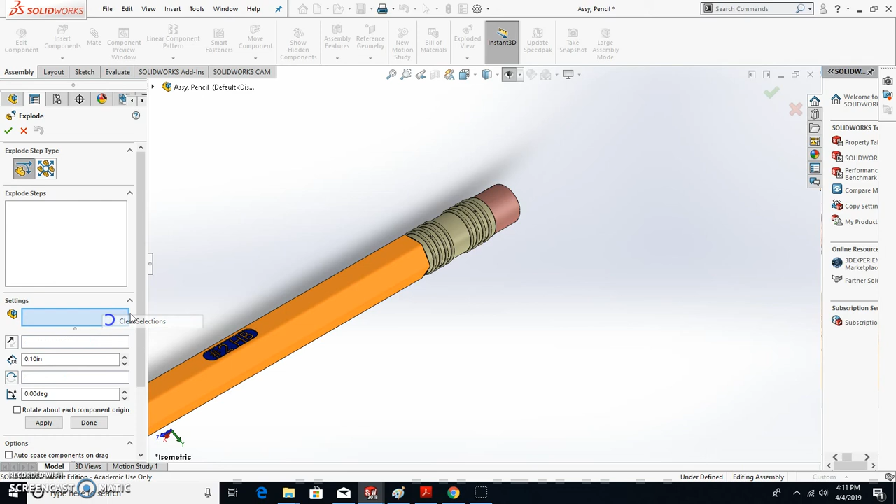The first thing I'm going to do is click on the ferrule and click on the eraser, because I want both of those to come out at the same time. That's one step. Then I'm going to click on the eraser and I want that to come out. That's another step.

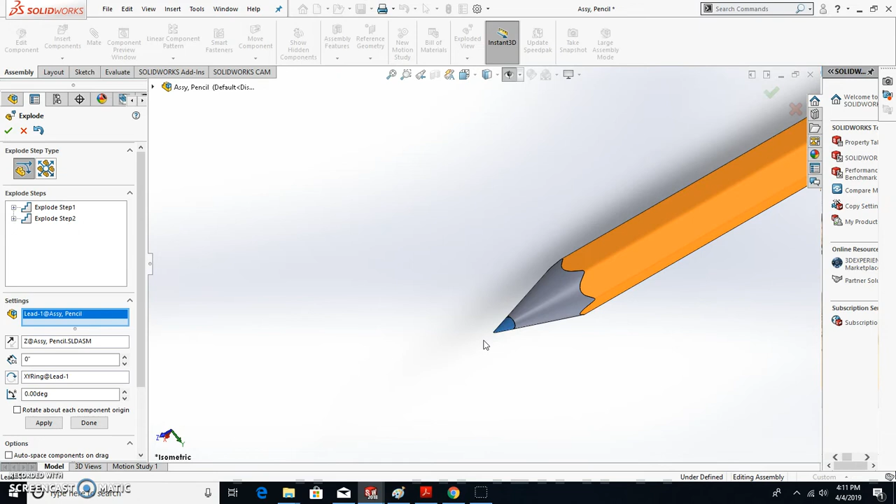Then I'm going to come to the other end and click on the lead, and pull on that same axis. You want all these pulling out along the axial or center line of the part.

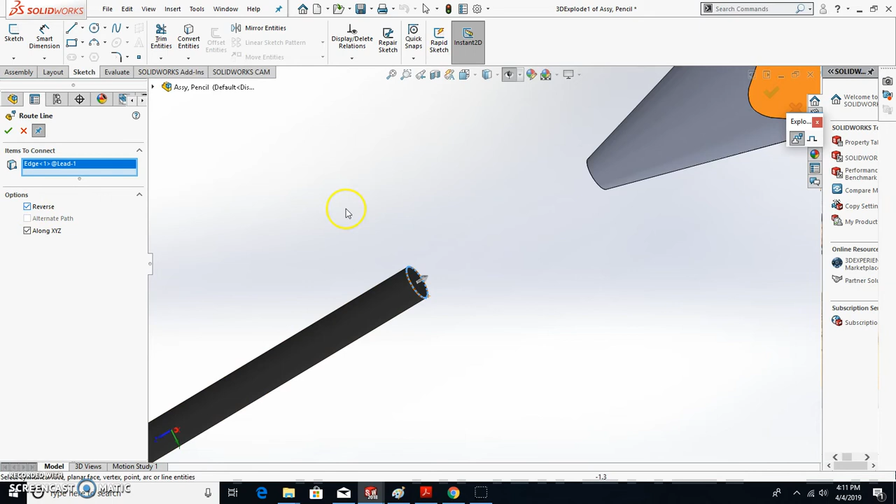Then you accept. And then I want to put in what's called an explode line sketch. I want that sketch to go from here, but the arrow's pointing in the wrong direction, so I'm going to reverse to that edge. Accept.

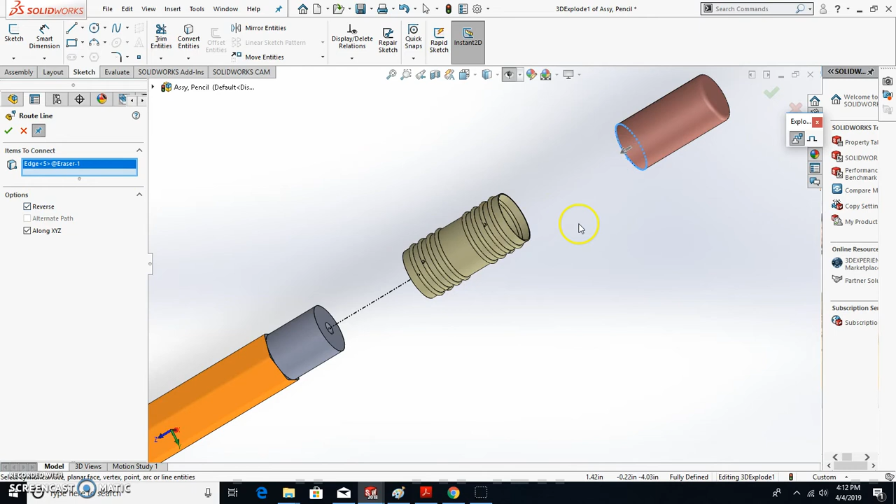And then from this edge, again it's going the wrong direction. Maybe I should pick the other one first. There, accept that. In here, well, of course, it's going the wrong way. And to here. Accept.

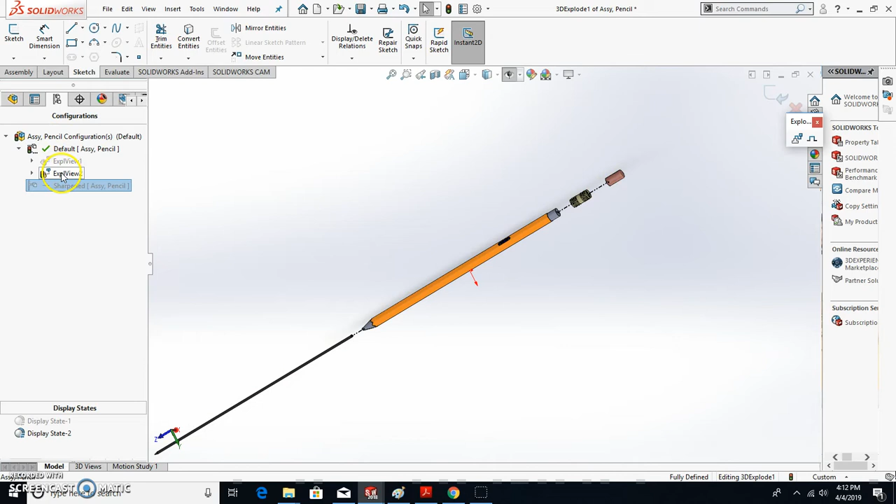Now what that is considered is a configuration, so it's a configuration of your assembly. This icon right here is configurations. So I double click on this—oops, not that—where it says default, click on exploded view, and it'll collapse.

You can also do something fancy by right clicking and animate, so we'll slowly pull those parts off. That's not really needed, so we'll just stop that.

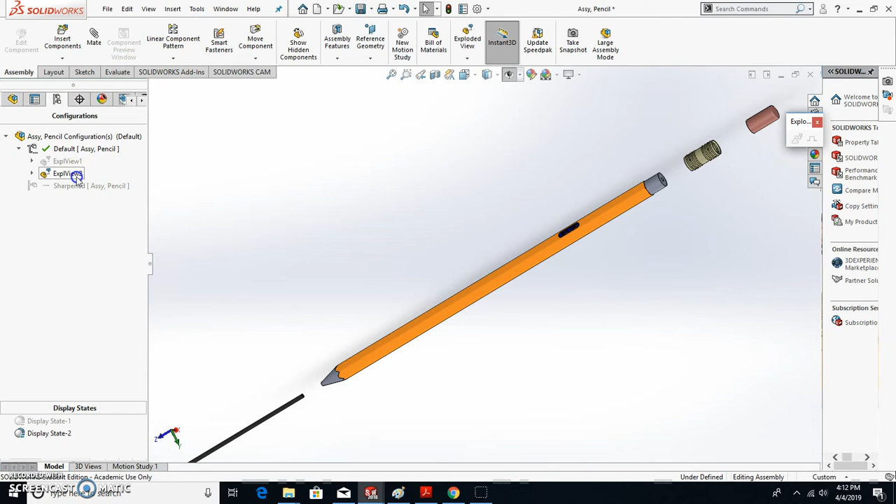So then I double click on the default, and I'll bring everything back to where it is. Alright, so from here we go up to File—well, actually, let's go back to the main. Go up to File, make drawing from assembly.

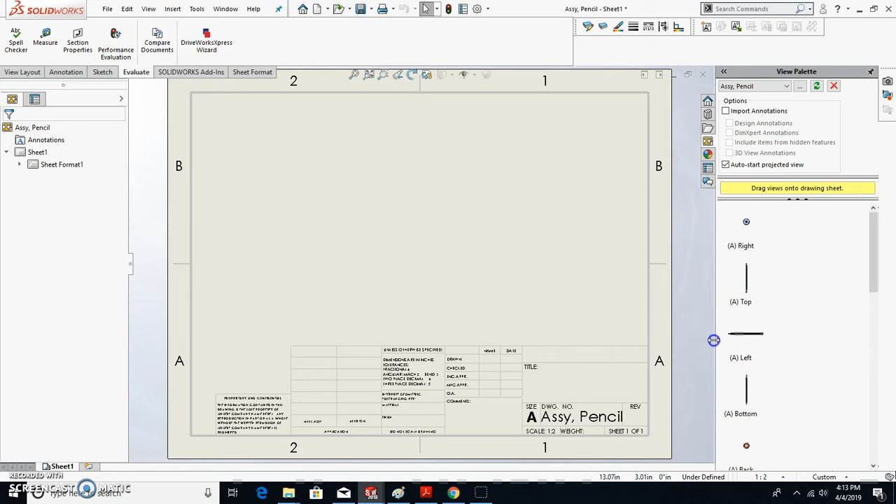Do the A landscape again, you guys should be used to this. So over here, I'm going to first pull in the isometric.

Then I want the isometric exploded. Don't let it lock into that one—I just don't like that, so then I have no control over it. So we're going to leave it down here, and then I'm going to move it up.

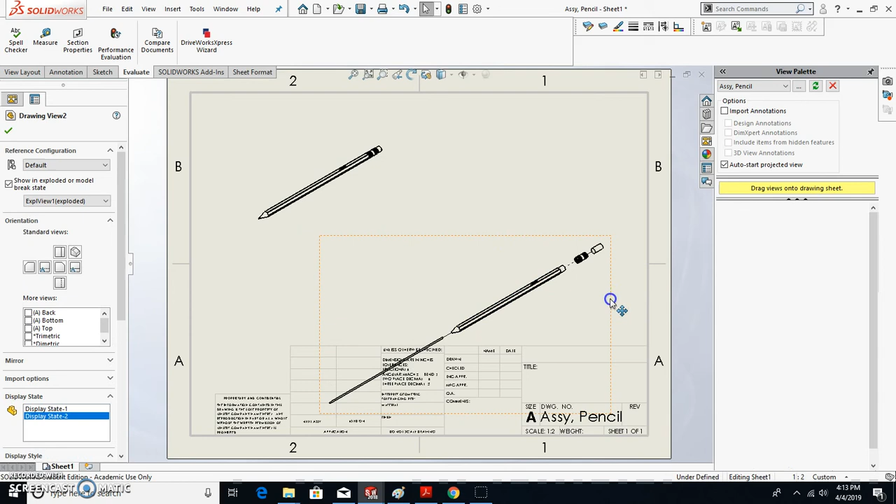Move this one over. I want these two shaded like the example drawing I gave you, so shade those. Shade this one also. Let's change the scale a little bit.

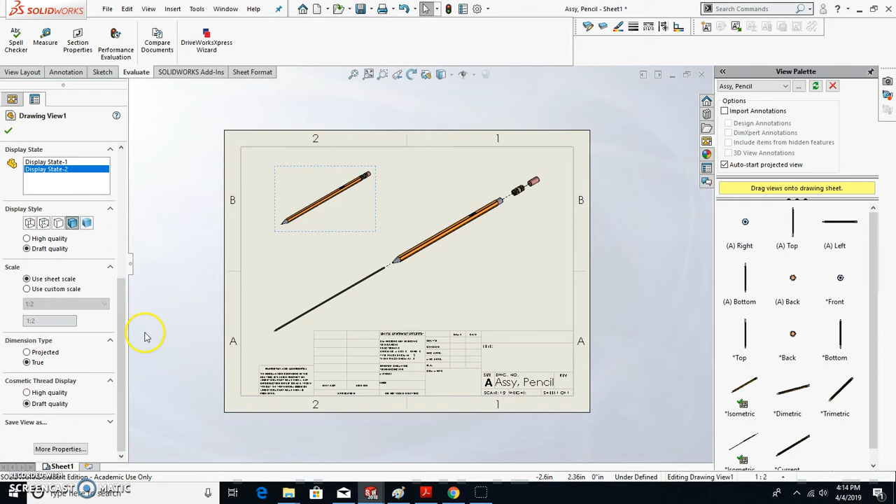Let's use a little bit bigger scale. Yeah, that's probably too much. So I'm going to go user defined, 1 to 1.5. That looks good. Same thing with this one—custom scale—and I'm going to just do a 1 to 1 on that one.

Alright, then I want you to go up to annotation, balloon, and then what we do is we identify each of those parts in the assembly.

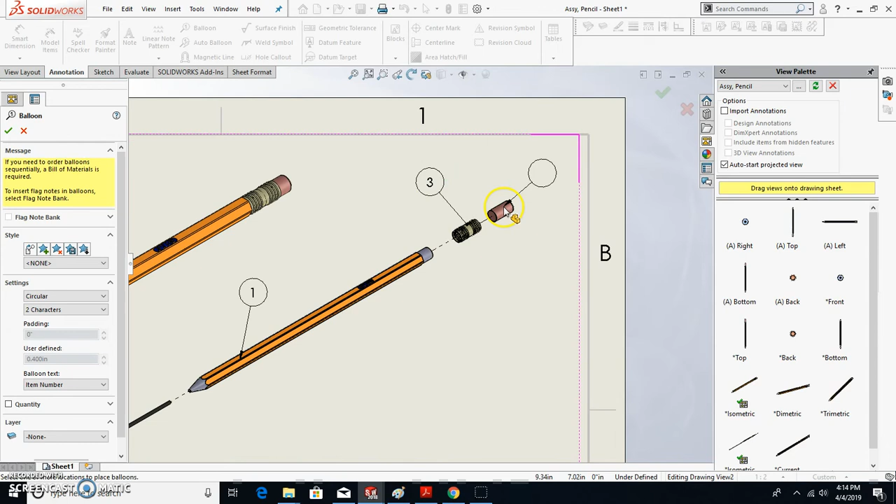Okay, then I'm going to insert the bill of materials. So go insert, tables, bill of materials, select on any view, select on that drawing view, accept that. Now here's the table that comes in.

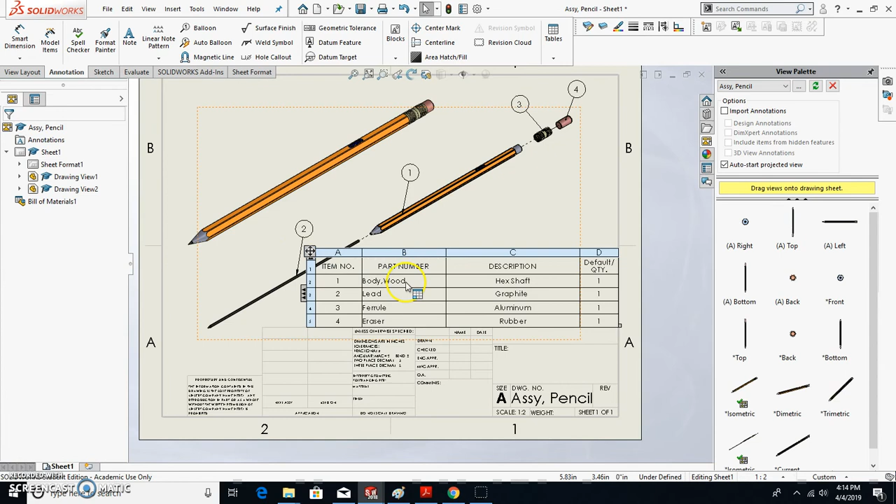This is kind of large, so I'm going to make this a little bit smaller. So, there we go—I grab that corner, make this a little bit smaller.

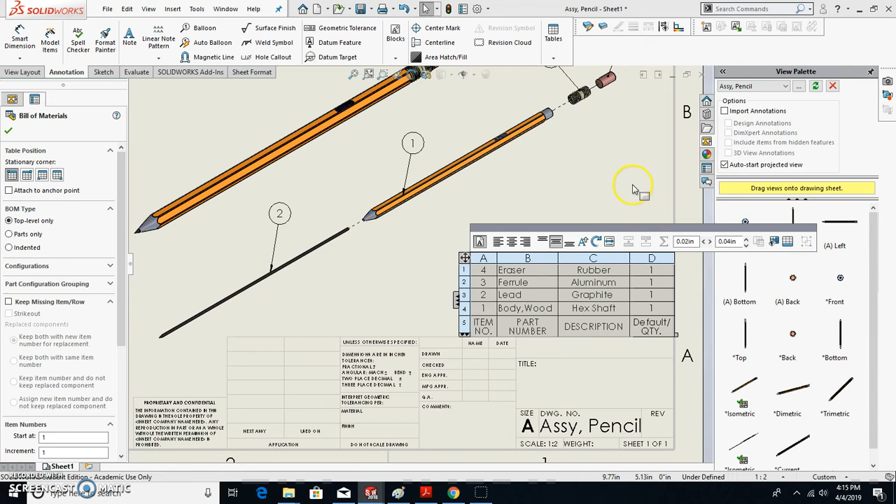Now the industry standards reorganize in the other direction. So again, what I'm doing here is clicking on the table—this will come up—and then you click on this table header, so the table header goes down like that.

These are basically coming from the description I put when I saved the file, and I probably didn't show you guys that. But let's say I open this one up, open the part. Alright, so there's the part. And then when I went to File, Save As...

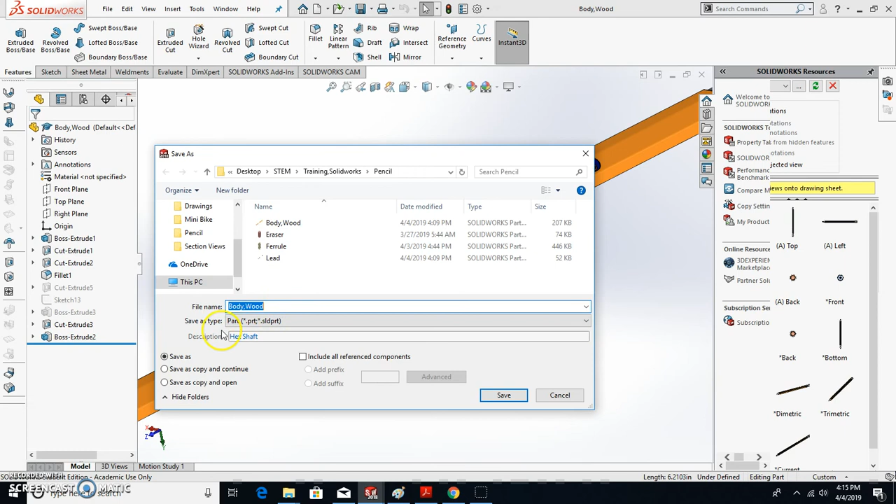Right under here, description—I put that under description, that's why it's populating it. You can also just double click in there and put those in there that way. Oh boy, I don't know why that stopped showing up, but that's part of the graphics on my computer at home.

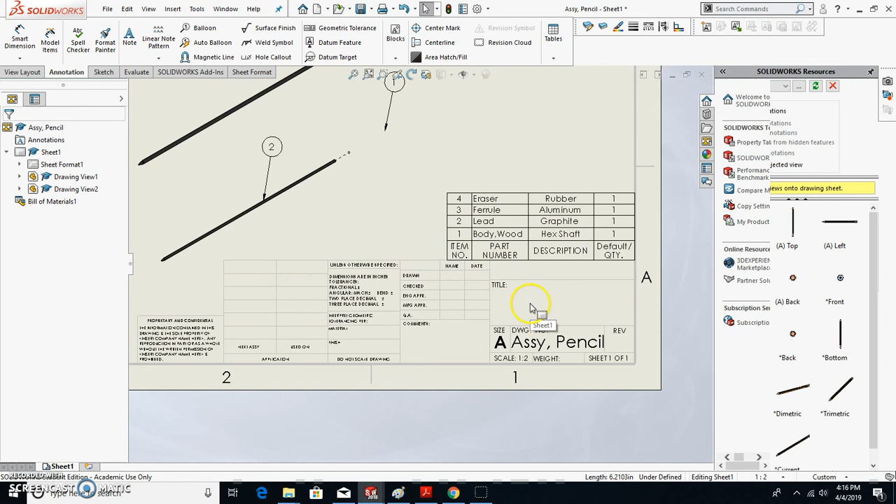So anyway, from here you just right click, edit sheet format, fill out the name, date. You don't have to do material because those are all dependent on the individual parts. And right click again, edit sheet, so then the views come back and you're seeing your balloons. And then you're pretty much done with this drawing, and then you print it.